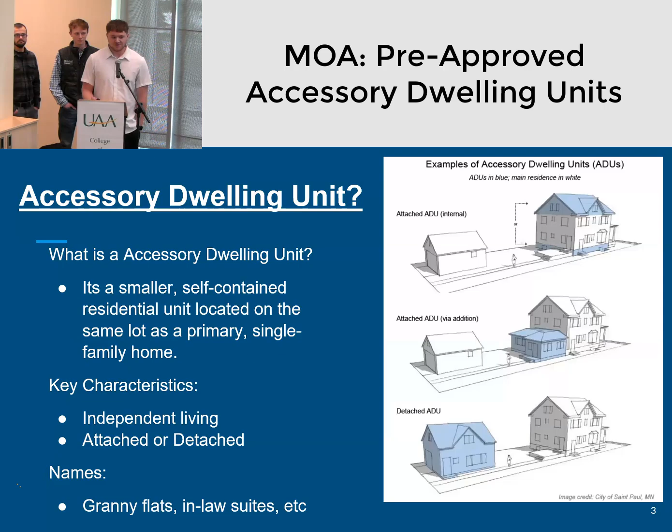And the key characteristic of this is they have to be independent and livable. And a couple of the names for these are granny flats or in-law suites, or most people just call them ADUs nowadays. I'm going to pass it to Tanner here.

So for our project background, the Municipality of Anchorage has a goal of increasing housing within Anchorage. They set the goal of about 10,000 housing units within the next 10 years. To get to that goal, they wanted to have about 5,000 ADUs as part of that 10,000 house goal. To accomplish that, they've passed zoning changes, increasing allowed housing density on residential lots, and they've also implemented simpler reviews for these ADU houses.

And part of that is the pre-approved ADU catalog. So the Municipality of Anchorage has a website where they have pre-approved designs for these ADUs. The municipality went through the design and checked everything to make sure it was all good, and then the designs go up on this website. You can fill out some forms and get the design. And once you have the design plans, you can get your upfront permits and building permits and everything, and then go build that.

So the pre-approved catalog comes with a reduction in upfront permit costs by about 50% because the Muni has already approved all the designs. Also, the elimination of design fees. Some previous ADU design costs were about $15,000, so this fee would go away since they have already been designed and approved.

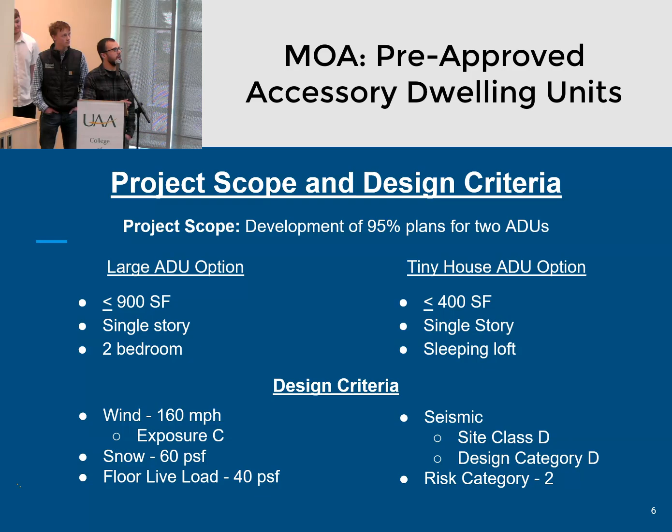The second option they asked for was a tiny home ADU. For this one, they were looking for something 400 square feet or less. 400 was also a special number because under 400, the special tiny home provision in the code applies. This allows for some space-saving measures such as lower ceiling heights and smaller living area requirements. This one is also single story, with a sleeping loft. Beyond that, we were given quite a bit of flexibility, because lots of personal preference goes into designing homes, so we worked with our architectural mentor on that.

Design criteria: some of our key criteria were that we designed for 160-mile-an-hour winds, as well as a 60-pound per square foot snow load. These are risk category 2, which encompasses most residential here in Anchorage. The goal is that they can be placed just about anywhere in Anchorage. There are still going to be some exceptions, such as some of the extremes way up on the hillside. So with that, I'm going to get into our designs.

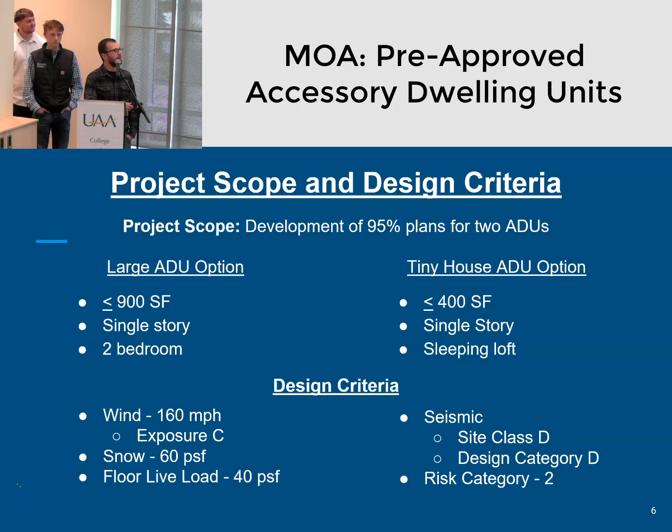So our first design here is Rendezvous, named it after one of the mountain peaks here in Anchorage. This was our large ADU option. So this one ended up being 896 square feet. We did get the 2 bedrooms to fit in it as requested, and it is single story.

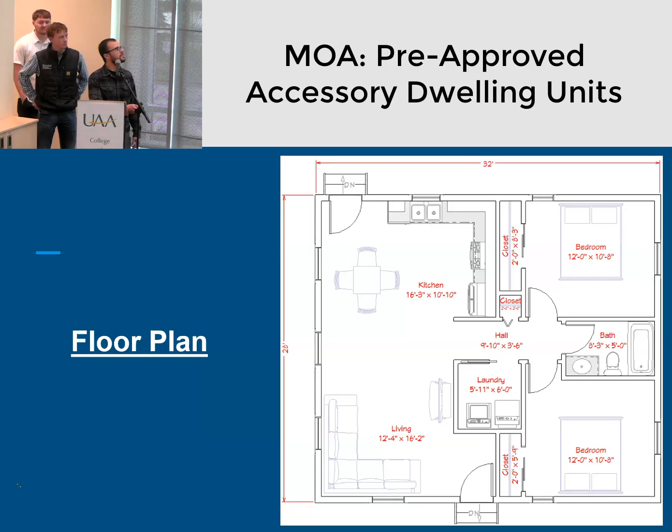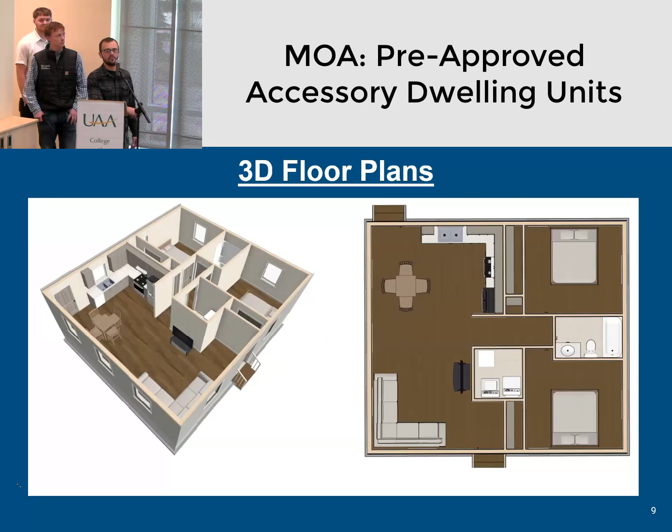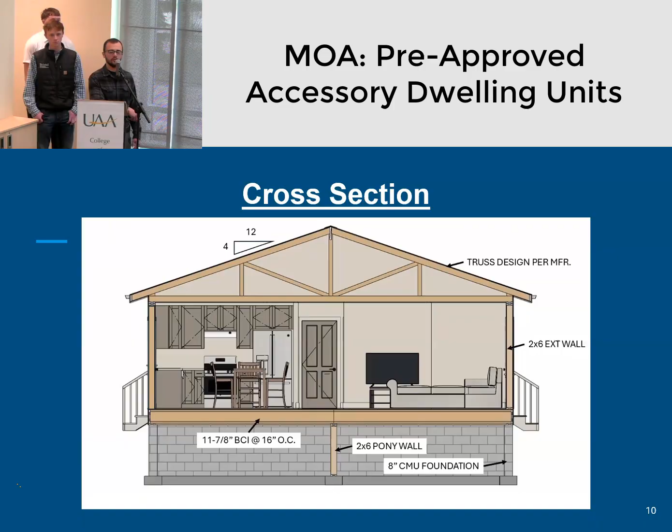And then with that, I'm going to turn it back over to Tanner to talk about our next design.

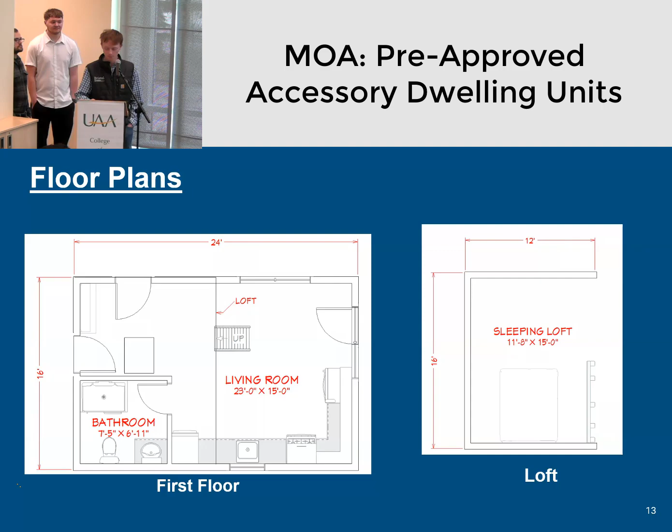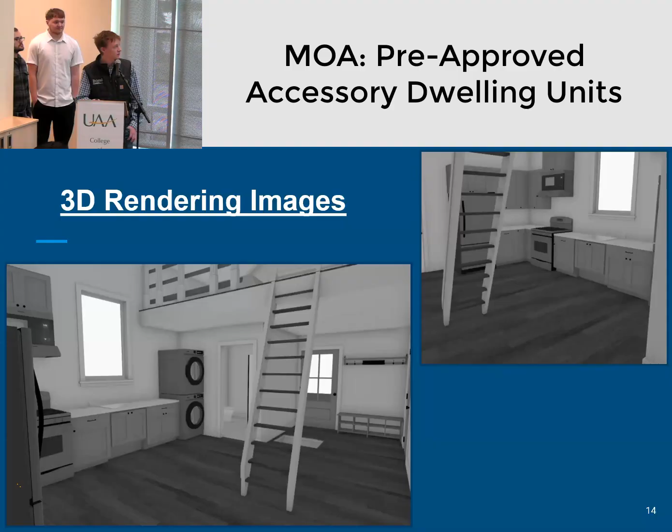And so now we get into the cross section. We've got an 8-inch CMU foundation. Like Kyle said earlier, pretty typical in Anchorage. And then we're using 9.5-inch BCI floor joists. These are the same for both the floor and the loft, so that way, when you're getting your materials, it's all the same and easy to get.

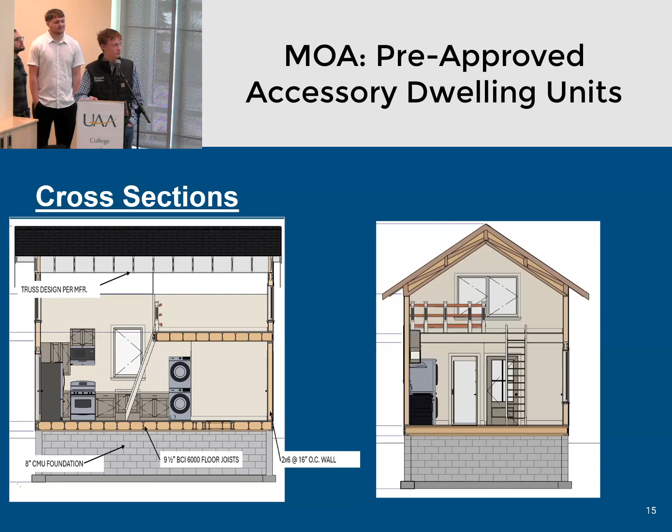Part of our deliverables was also a cost estimate. So these cost estimates were like blank canvas, cold shell, so minus like cabinetry and finishes inside. Those will be up to the homeowner. And then also we kind of broke it out as if you hired a contractor to build the work or if you were doing the work yourself.

So Rendezvous, our big ADU, if you hired a contractor, so with labor, it was about $255,000. And then just materials only was about $140,000. The smaller ADU, Mile High, with labor, so with a contractor, it's about $155,000 for them to build it. And then without labor, like you were building them yourself, about 90 grand.

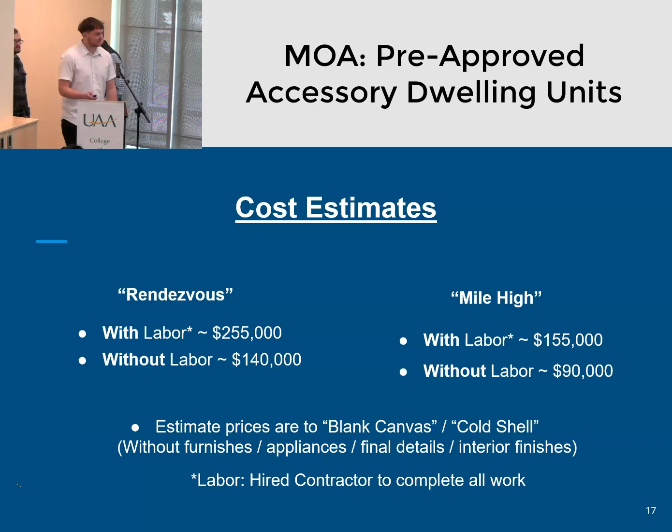All right, some of our lessons learned. The biggest one was schedules are only effective if they're reasonable. Initially, we had a very compressed schedule, and that did not work for us. We just initially started submitting incomplete work, and it just didn't work. So we had to space it out a little bit, and we ended up submitting something that we're pretty happy of. Our next one is to utilize modern software to save time, but you have to ensure there's a reasonable way to check it and make sure it's actually right.

And then the earlier the better. Don't procrastinate. That's like the college rule for everyone. And then free AI has its limitations. Funny story is we used an AI to make all the renderings, but it took us probably like 5 days just to make a nice rendering because it's only 3 tries per day. So yeah, it took us a little while. And those 3 tries were not the greatest.

And a couple of special thanks. Our client, who is Daniel King. Our professional architectural mentor, who is Petra Wilm, our professional structural mentor, who is Seth Anderson, and our faculty advisor, who is Scott Hamill. And thanks for being here. And any questions?